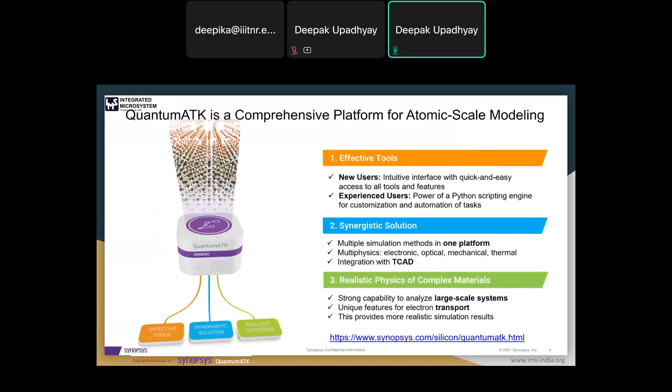This Quantum ATK is a comprehensive platform for atomic scale material and device modeling. We also offer effective tools for achieving realistic outcomes, and a synergistic solution to solve complex problems. Now, if we talk about the bigger applications of this tool...

Any kind of molecule you can design, whether inorganic or organic molecules. We also have the surface builder, so for creating any kind of surface structure, basically we need to define the Miller indices, such as 100, 101, 111. Whatever combination you want to create the surface with, just define the Miller indices, and the software will automatically create the surface structure.

Even the interface between two materials, or more than two materials, is also possible. And if we talk about device applications, in this Quantum ATK we support one-probe device structures, two-probe device structures, even three-probe device structures that you can easily simulate, like MOSFETs and transistors. So these are the bigger applications where you can utilize this Quantum ATK.

With this QuantumATK, one can model a wide range of atomic physical systems, including molecules, polymers, 1D and 2D materials, any kind of crystal structure, amorphous materials, interfaces and multiple layer structures, and even device simulations that you can easily create. It also comes with tailored GUI tools to build and visualize such models, set up the script, manage local and remote machines, and analyze the results.

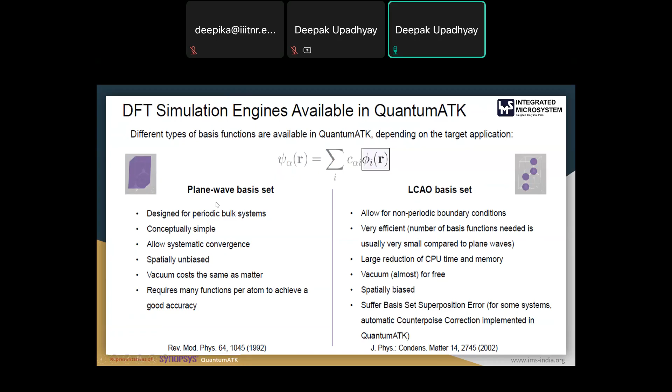So the conclusion is that the hybrid functional DFT-LCAO is up to 10x to 100x faster than the DFT plane wave method.

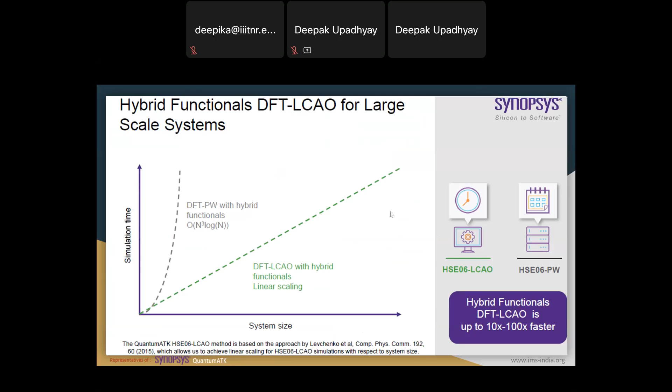Now it also comes with the DFT plus non-equilibrium Green's function method for simulating realistic interfaces and surface structures. This DFT plus NEGF method is an accurate tool to study interfaces and electronic devices. Here you can see we have the two-probe device structure where we have the left electrode, right electrode, and also the center region.

Not only the two-probe device structure, even three-probe device structure you can easily simulate, and then you can define their biasing voltage, gate voltage, so that you can simulate their resistance, capacitance, and IV characteristics. This NEGF method you can combine with the linear combination of atomic orbitals (LCAO) basis set, and you can also combine with the plane wave basis set, and even with semi-empirical tight binding models.

Now this Quantum ATK also comes with battery modules. So you can also design batteries like sodium ion, lithium air batteries, and then study their cathode materials using a multi-model computational approach like DFT, semi-empirical, classical force field, and the machine-learned force field simulation. You can also obtain the lithium ion diffusion path and rate using a combination of techniques like the nudged elastic band method, harmonic transition state theory, and adaptive kinetic Monte Carlo simulation.

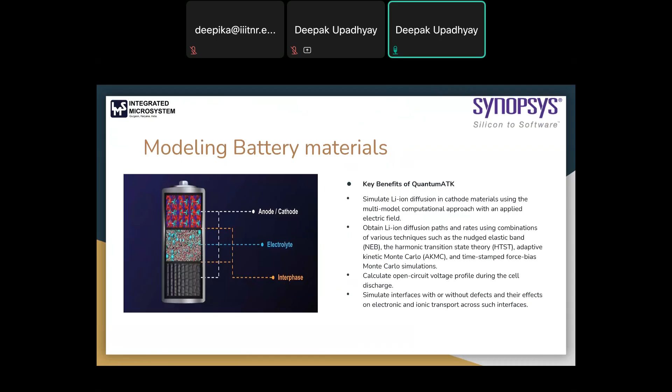Now, if we talk about the bigger applications of this Quantum ATK software, it covers a wide range of applications starting from materials to devices.

If you talk about semiconductor applications, users can study the properties of new materials, interface structures, contacts and stacks, and their impact on logic and memory devices. And if you talk about battery materials, users can design novel battery materials for cathode and anode, liquid and solid electrolyte materials, and even calculate the open circuit voltage.

And if you talk about solar cell simulation, you can design novel photovoltaic materials and even devices with improved photocurrent. You can follow the standard solar cell spectrum in the center region, and then study various electrical properties. For polymer simulation, you can design polymers with improved thermomechanical, thermoconductivity, and optical properties. And even catalysis, metals, ceramics, and glasses are also possible.

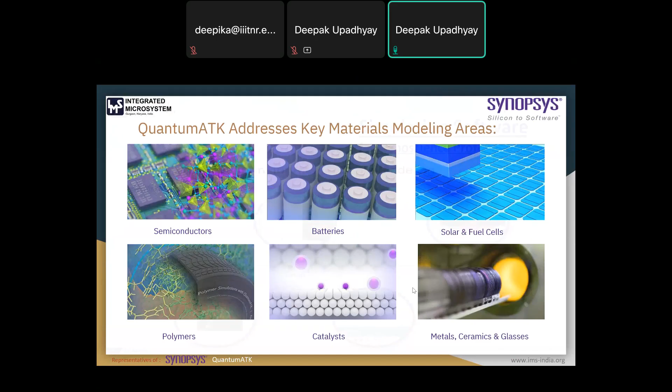Now, if we talk about the simulation procedure in this Quantum ATK, typically you need to create your structure in the builder. Any kind of structure you can create, and then you can go to the setup, which is possible from the workflow builder. So you need to set up your calculator.

You can see we have DFT LCO, DFT plane wave, semi-empirical, and also classical force field and machine-learned force field simulation. In the meantime, you can also select your analysis part, and then go to the run option. That will be possible from the job submission settings, where you can fire the job from the GUI to the local machine or a remote machine.

And once you've done the simulation, you can visualize your structure using the visualizer tool, either in 1D view, 2D view, or 3D view.

It also comes with machine learned force field simulation. So the question arises, why do we need this machine learned force field simulation? It is an accurate dynamical modeling tool for complex structure generation, mechanical properties, thermal properties, electron phonon scattering, diffusions, and also process simulation for atomic layer deposition and atomic layer etching.

Other dynamical tools are typically limited to 100 atoms due to turnaround time limitations. But most industries require 10,000 plus atoms to be simulated at a single time, and that is not practical with quantum-based methods because of the quality of results and turnaround time limitations.

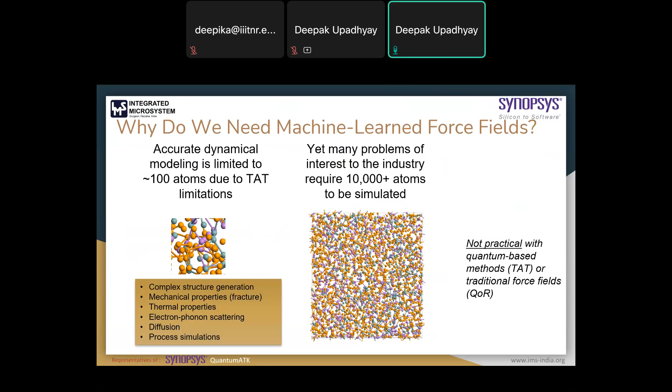For atomistic modeling, we typically work within three types of models that provide different levels of accuracy at different computational costs. At the low level, we have traditional force fields, which are very efficient but often lacking quality of results. In the middle, we have semi-empirical models like tight binding, which can provide higher accuracy at higher computational cost. At the top, we have ab initio methods like density functional theory, which can provide higher accuracy but at increased turnaround times.

So here we have the machine learned force field simulation, which will allow you to train a potential to reproduce ab initio results at low computational cost, similar to the traditional force field.

Here you can see we have simulated an amorphous HfO structure, and in this structure we have a total of 96 atoms. We performed 50 molecular dynamic steps on 16 cores. In the case of DFT with molecular dynamic simulation, it took 3 hours, 21 minutes and 27 seconds. Using MTP, the moment tensor potential, which is part of machine learning technique, it took 10 seconds, and using the classical force field, it took 9 seconds. But we get maximum accuracy with low computational cost by using the machine learned force field technique.

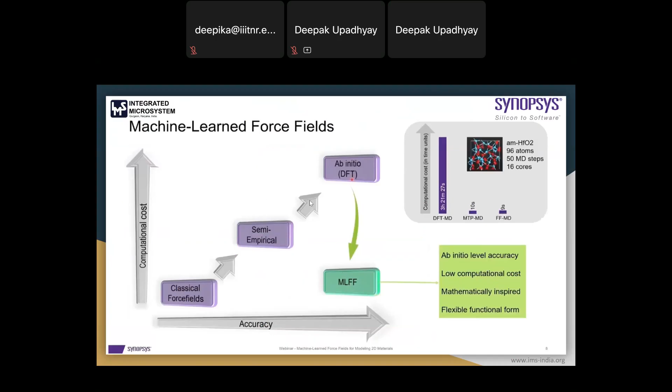These are some machine learned force field applications where you can use this MTP, moment tensor potential, for the structure of complex crystals and amorphous materials, structure of multiple layer stacks, formation of defect clusters, interdiffusion, defect diffusion, thermal transport, crystallization, and also amorphization.

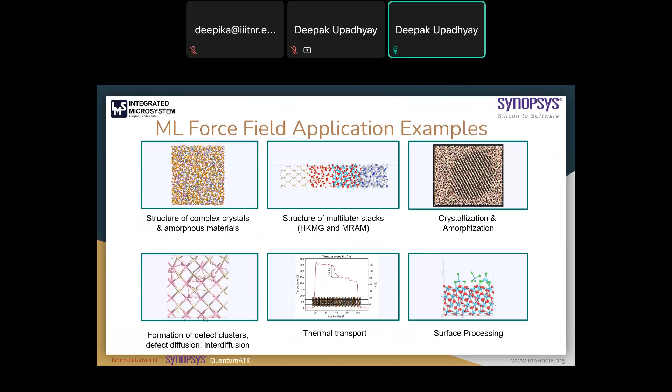This Quantum ATK comes with a sophisticated graphical user interface called Virtual NanoLab. This GUI is very easy to use, and it also comes with a Python programming interface that enables experienced users to efficiently implement complex workflows and perform advanced data analysis.

Now, if we talk about some advanced analysis that a user can do in this Quantum ATK, we also support molecular dynamic simulation. We have both classical molecular dynamic simulation and ab initio molecular dynamic simulation using different techniques like NVT, NPT, stress strain, Langevin, and you can also optimize your geometry and perform optimization for devices. You can also do dynamical matrix, Hamiltonian derivative, charge point defect, and even polymer simulation is possible.

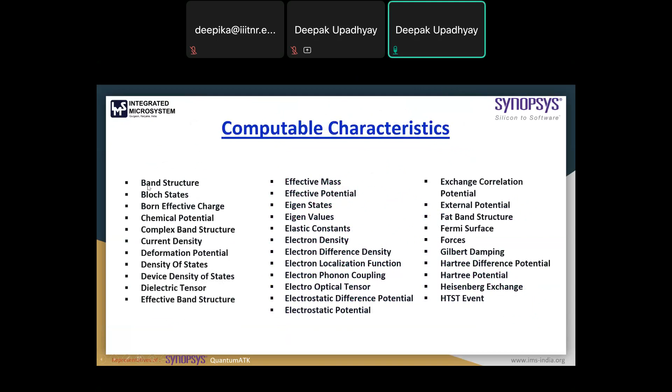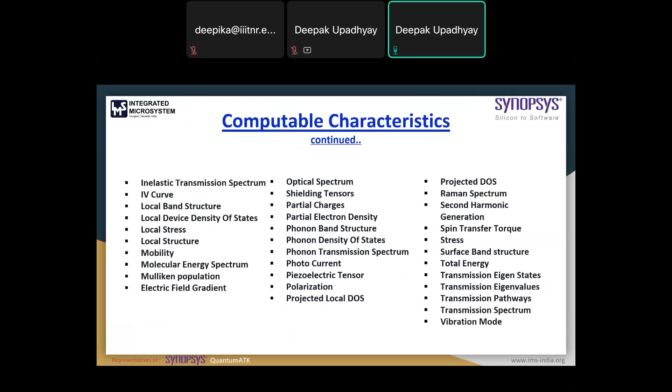These are some listed computable characteristics for materials and devices that users can study in this Quantum ATK, like band structure, Bloch state, Born effective charge, chemical potential, complex band structure, density of states, phonon band structure, optical spectrum, and also projected density of states, Raman spectrum, photocurrent. So these are the list of computable characteristics.

If we talk about the job manager, it is basically responsible for running the job from the GUI to the local machine or a remote machine. On the local machine, we support serial, threaded, and parallel execution for faster simulation. We also support remote submission modes like TORQUE, PBS, Slurm, SGE, LSF, and also direct execution.

If we talk about system requirements, for using this Synopsys Quantum ATK software, there is no external library dependency beyond the standard OS packages required. If we talk about ATK, that is the background simulation engine, and VNL, Virtual NanoLab, that is the graphical user interface. Both the calculation engine and the GUI are available for both Microsoft Windows and Linux 64-bit operating systems. It also comes with MPI parallelization for faster simulation, and it comes as a floating license.

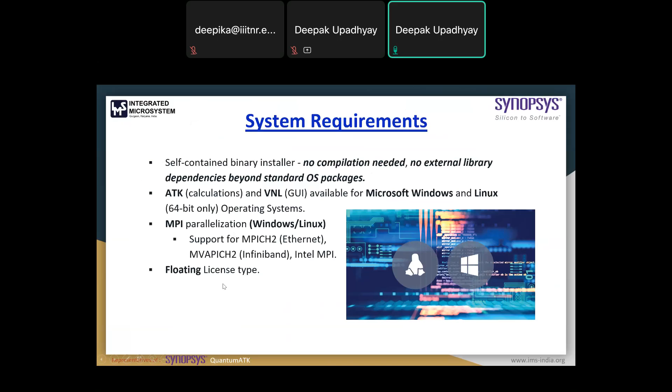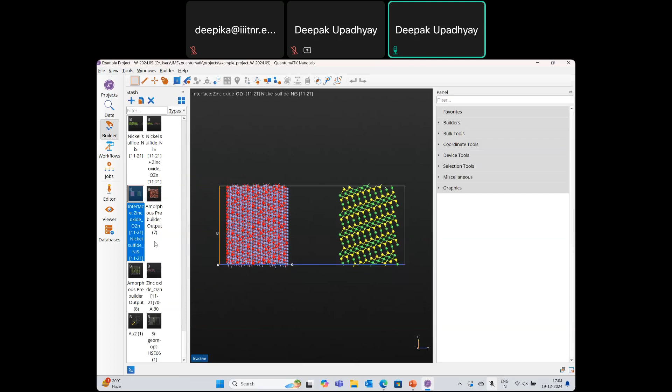This is the builder, the main part of this Quantum ATK, where we need to create our structure, and whatever structure we create will be stored in the stash. So this area is called the stash. Here we will show the 3D view, and this is the advanced panel toolbar.

This advanced panel toolbar will help you create your desired structure. We have various builders: AFM cantilever tip structure, amorphous builder, alloy builder, icosahedron builder, interface builder, nanoparticle, nanowire, nudged elastic band, and even the bulk tool option. You can repeat your cell, merge the cell, create the super cell, lattice, and we also have the device tool as well.

So this is the workflow. In the workflow, you can see we have various calculators: the LCAO calculator, the device LCAO calculator, plane wave calculator, semi-empirical calculator, device semi-empirical, force field calculator, and also the ground state calculator that combines with the many body perturbation theory.

Here you can see this is the job submission settings. This is the local machine. If you want to run the job on a remote machine, then you need to set up the remote machine first. So you can see this is the new direct remote machine, local machine, LSF, PBS, PBS Pro, SGE, and also the Slurm machine.

Now this is the editor. If you are expert at writing the script, then you can write your own script here. And if you are not aware, then you can go to the builder part.

This is the view where you can visualize the 3D view, and this is the online database. In the online database, you can see we have the Crystallography Open Database, and we also have the Materials Project.

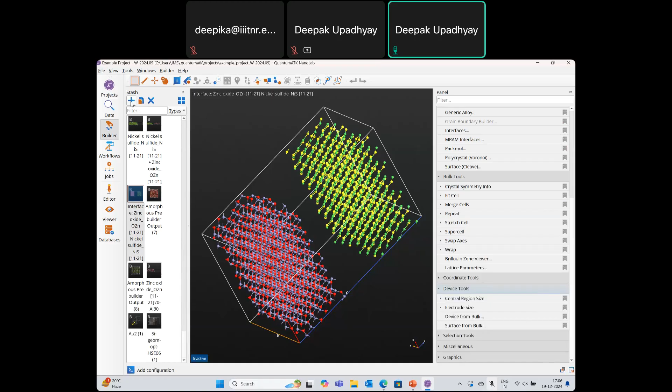So if you want to start from scratch, you need to select this builder and select this add option. In the add option, you can see we have the new configuration. Once you select a new configuration, a default isolated hydrogen element will be added. You can see this is hydrogen with the fractional coordinate point 0, 0, 0.

If you want to change this hydrogen with any other element, you can see we have the toolbar and we also have the periodic table. This is the periodic table. Any element you can select as per your need, and then you can change the element. So you can see the hydrogen has been replaced by the aluminum element.

Now if we talk about the database, this is the local database where we have the molecular structure, crystal, fullerenes, zeolite, monomers, and also the ground state element. So these are the list of molecular structures.

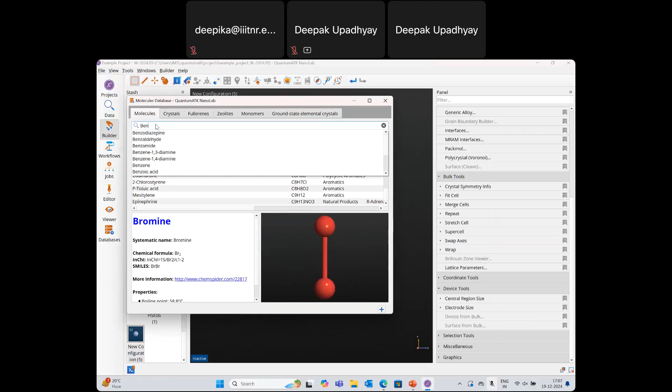You can easily search the molecule here. Like you can see, this is the benzene molecule. And if you want to know the property of this benzene molecule, you can see this is the chemical formula and this is the properties, like we have the boiling point, melting point, molecular weight.

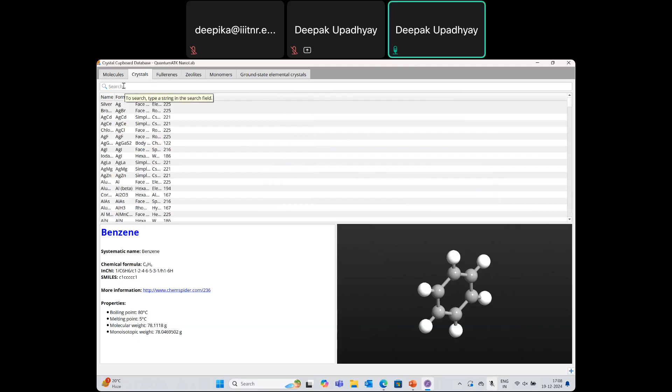This is the crystal section, so we have the list of crystal materials as well. We have various lattice types like face center, body center, rhombohedral, and hexagonal. Here you can also search the material. Like you can see, this is silver, and it's a face center cubic structure. You can see the ABC value and the symmetry information, along with the element and their fractional coordinate points.

We have the fullerene structure as well. You can see these are the fullerene materials, and these are the zeolite materials. We also have the monomers for polymer simulation.

Even importing new monomers is available. Here you can see this is the import option. In the import option, you need to define the name, their group, and the type of monomer, and also import the molecules. Then it will convert the molecule into a monomer, and you can easily simulate and study it for polymer simulation.

Here you can see these are the ground state elements. If you want to add any material in the stash, you simply need to click on this add option. You can see this is the silver that I have imported from the local database. Suppose the material you want to work with is not available in the local database, then you can go with the online database.

Here we have the periodic table. In the periodic table, we need to select our elements first. Like you can see, this is hydrogen and this is oxygen, so two elements have been selected. Now you need to click on this search option, and it will search every possible combination of hydrogen and oxygen.

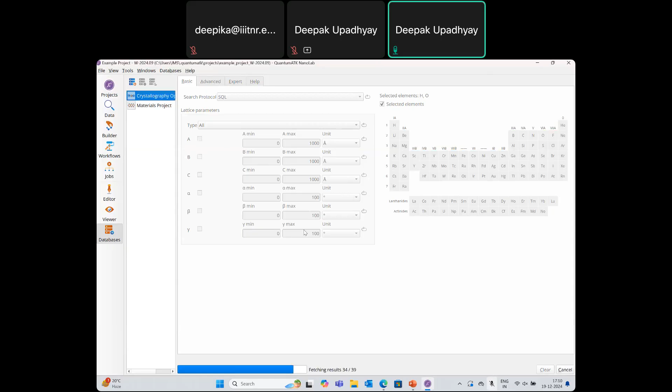Now you can see it is searching from the Crystallography Open Database, and similarly you can also use the Materials Project. You can see it has found 39 structures with different crystal types, like simple tetragonal, base centered, rhombohedral, hexagonal, and simple cubic structure. Like you can see, this is hydrogen peroxide, this is the lattice information, this is the symmetry information, and also this is the ID number.

Now, if you want to add this structure into the builder, you need to click on this arrow and then select builder. You can also download this file, and even copy this COD identifier number. So you can see this is the COD identifier number.

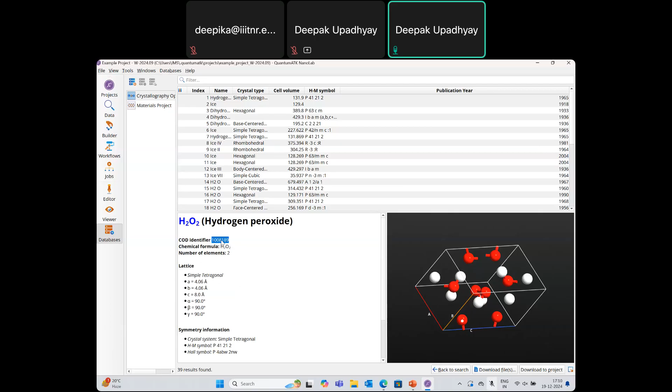You can go to the builder, select this add option, and you can see this is the plugin toolbar. We have the Crystallography Open Database for crystals, and we have the PubChem database for molecules. You can see it is asking to enter the COD identifier number, so we will paste the COD identifier value and click on this download option. Then it will easily download our structure into the stash, and we can visualize the 3D view here.

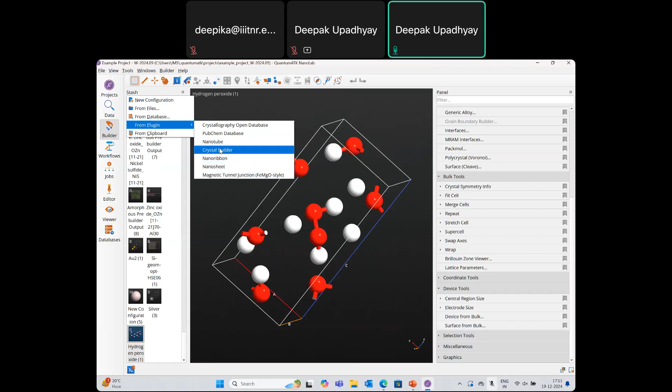Suppose the material you want to work with is not available either in the local database or the online database, then you can create your own structure using the plugin toolbars. This is the crystal builder that will help you create any kind of crystal structure, either triclinic, monoclinic, orthorhombic, tetragonal, trigonal, hexagonal, or even cubic structures like face centered cubic and body centered cubic. Then you can define their ABC value, alpha, beta, gamma value, and add the element and their fractional coordinate point.

Then you can see this is the preview option where we have the primitive cell and the conventional cell. Suppose I would like to take a face center cubic structure, so I would select their space group, and you can see the Bravais lattice will be automatically selected, and this is our face center cubic structure. Here we can define the ABC value as per our research work.

Then you can add the element by selecting this add option. You can see these are the various fractional coordinate points, so I would like to go with XYZ. You can see it has automatically selected the hydrogen element, and this is the structure.

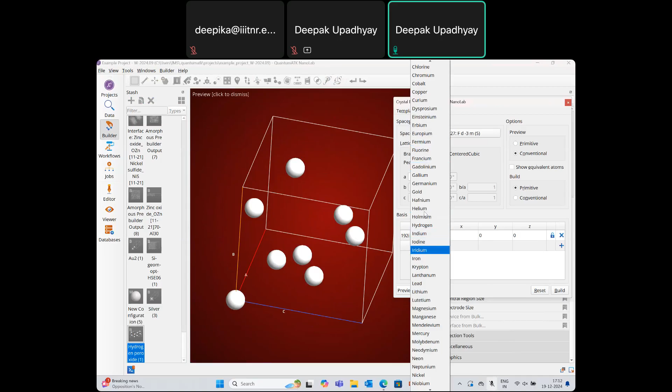If you want to change this hydrogen, you need to double click, and you can see this is the list of elements. If you want to select gold, you can see this is the gold material, and this is the conventional cell. If you want to show the primitive cell, select primitive and go to the preview option, and you can see this is the primitive cell. This way we can easily create any kind of crystal using the crystal builder, and once you're done, you need to click on this build option.

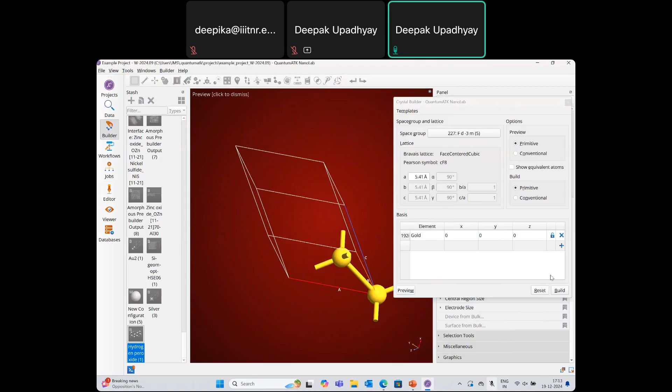And here you can see we have the more plugin toolbars. We have the nanotube builder. By using this nanotube builder, we can create multiple nanotubes. Here you can see we have the inner tube, center tube, and outer tubes.

And here you can see we have the chemical properties. So at site A we have the carbon, at site B we have the carbon. You can also change the element from the periodic table, and you can define the bond distance. If you go with the default value, you can see this is the carbon nanotube. Now you can also change the chiral vector N and M value as per your need.

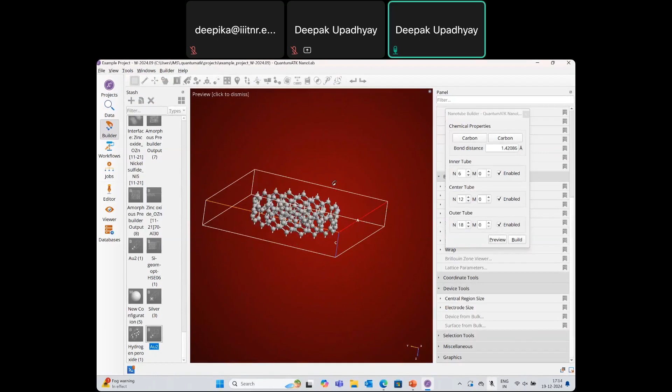If you want to enable the center tube as well, you can see we have the inner tube, we have the center tube. So we have three tubes: center, inner, and outer tube. So this is the carbon nanotube.

If you want to design any other nanotube, simply you need to replace the site element. If I select this silicon element, you can see it will create a silicon carbide nanotube.

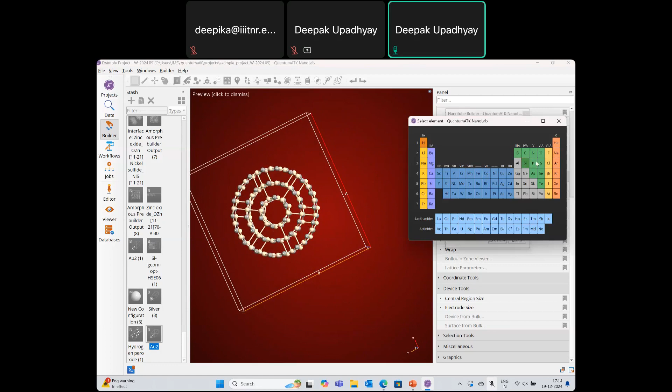And if you want to work on the MoS2 nanotube, we need to replace both the site elements. You can see this is the molybdenum at site A and sulfur at site B. And then you can define the bond distance. For desired bond distance, you can design, and then you can go with the inner tube, center tube, and the outer tube. Now you can see this is the MoS2 nanotube.

So I would like to go with the center tube, select this preview, and then click on this build option. Now you can see this nanotube is quite thin.

So if you want to increase the length, you can go to the advanced panel toolbar. And in the advanced panel toolbar, we need to go to the bulk tool. In the bulk tool, you can see we have the repeat option. So we can repeat our cell in any of the directions, either direction A, direction B, and direction C. So I would like to repeat in the transport direction, that is C.

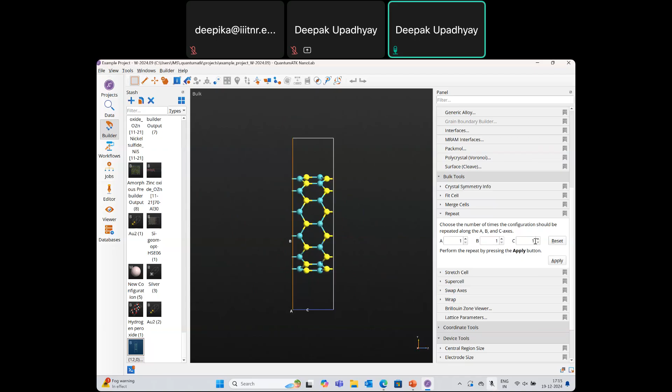So you can see 10 times in the transport direction, and then apply. Now you can see the length of this nanotube has been increased 10 times in the transport direction. So this way we can easily increase the length of any structure.

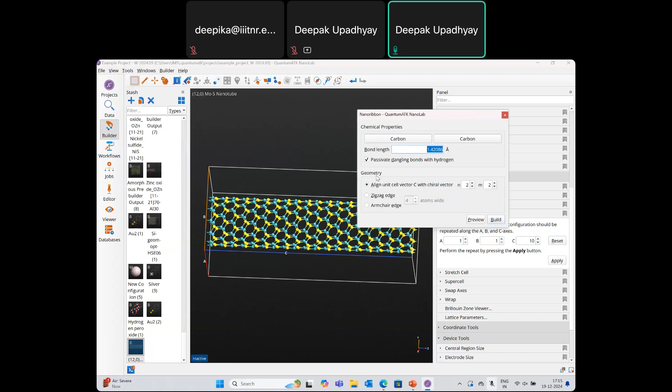And now if we talk about the nano ribbon, similarly we need to define the chemical properties, their bond length, and also the passivation with the hydrogen element. Then that you can also include. And then you can go to the geometry, where you can define either align with the chiral vector and n, m value, or you can go with the zigzag and the armchair structure.

You can see it is aligned with the chiral vector and n, m value. If you want to show the zigzag, this is the zigzag structure. And if you want to show the armchair, this is the armchair graphene nano ribbon.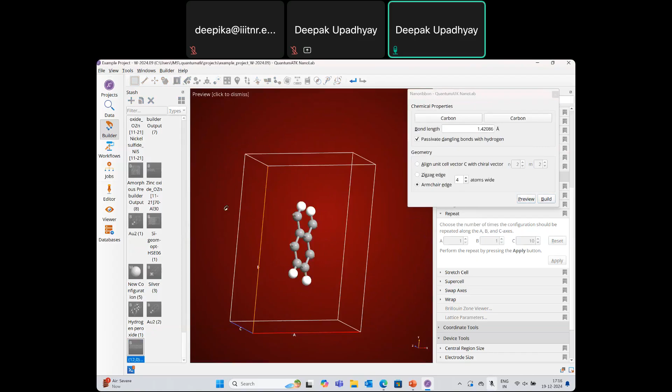So I would like to align with the chiral vector, and you can also increase the length, and then select this preview. So this is the graphene nano ribbon. And if you want to create a nano sheet, you can see this is the nano sheet option.

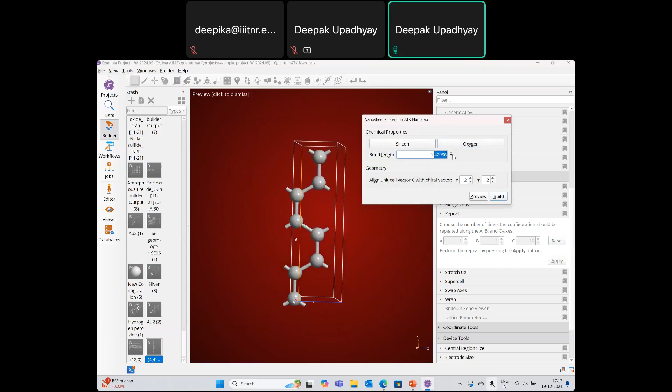Similarly, we need to define the chemical properties, bond length, and then the chiral vector, and select this preview. So you can see this is the graphene sheet. If you want to create a silicon dioxide nano sheet, here we will select the silicon element, and if I select the oxygen, silicon dioxide, and then you can define their bond distance, and then select this preview. Now you can see.

So this way we can create any kind of nano sheet, and if you want to increase the length, you go to the advanced panel toolbar, select this repeat option. Now you can see. So this is the single layer.

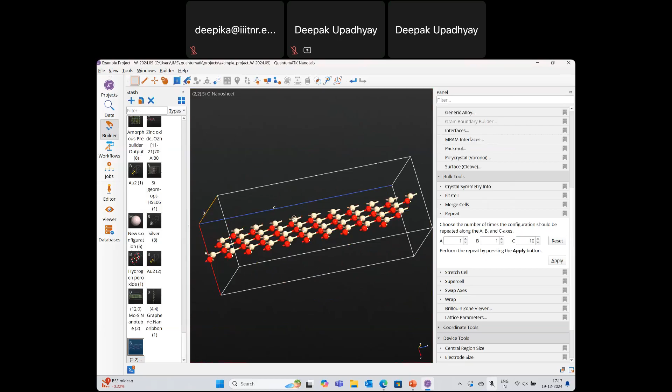If you want to work on the multiple layer structure, simply you can copy. So first you can select the element, then copy, and then you can manually paste here. And either you can go with the mirror option. Here you can see, so this way you can work on the multiple layer as well.

Now if we talk about the magnetic tunnel junction, you can see we can define the electrode element at the left side and the right side, then define the lattice constant, and then you can also enter the electrode extension layer, and then you can define the barrier materials. So in the barrier material, it will be oxide materials, and then you can define the number of layers and the separation, and then you can select this preview.

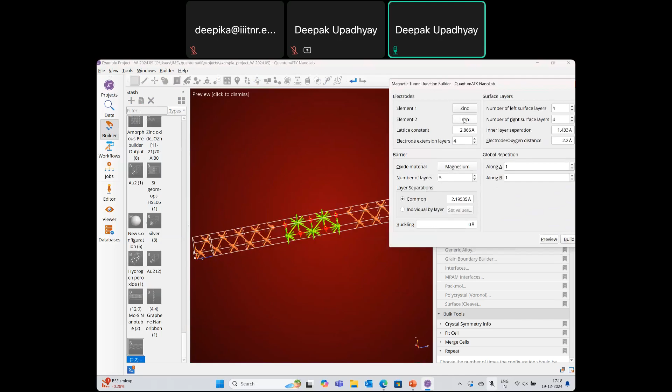Now you can see we have the iron at the left electrode, iron at the right electrode, and we have magnesium in the center region. So this is the magnesium oxide in the center. You can easily change any element from this periodic table. Suppose I would like to select the zinc at the left and right, you can see.

So this is the magnetic tunnel junction.

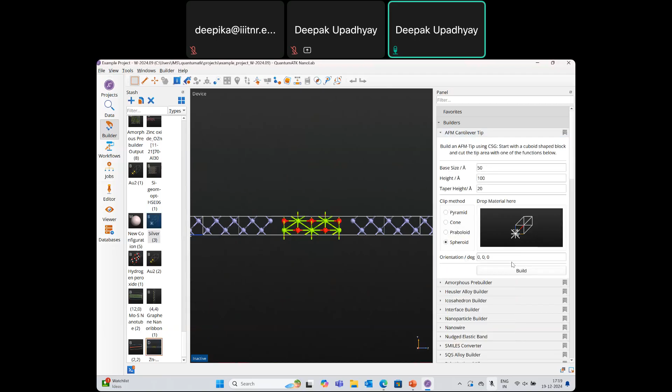If we talk about the advanced panel toolbar, you can see this is the AFM cantilever tip structure. For creating the AFM cantilever tip structure, basically we need to drop the material, define the base size, their height and taper height, and then define the clipping method. Suppose I would like to go with silver. You can see I have dropped the silver material in the material section, and if I go with the default value, you need to click on this build option.

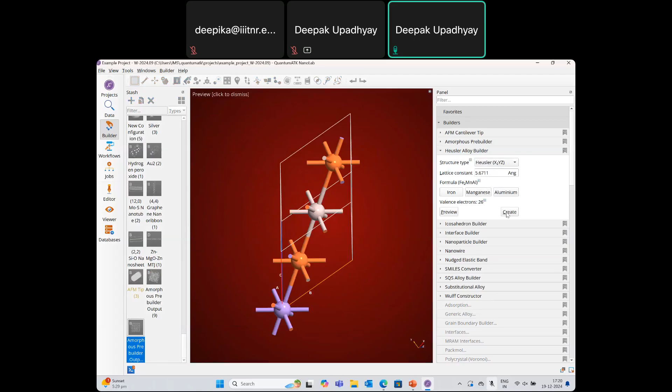And if we talk about the alloy builder, this is the Heusler alloy builder. Here you can see we have the structure type, with a different combination of X, Y, Z, where X and Y are the transition elements and Z is the main group element. Here you can define the lattice constant, and then define the formula. This way you can easily create a Heusler alloy structure.

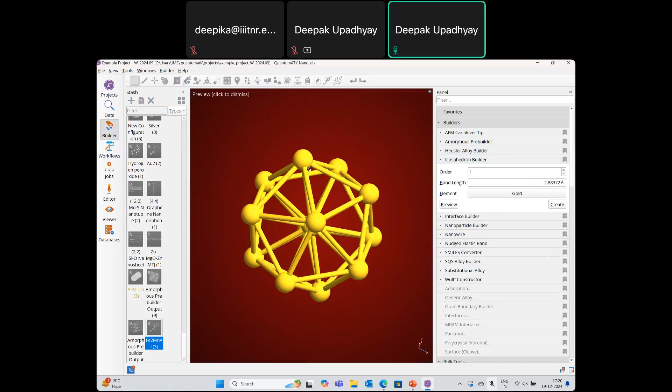And if we talk about the icosahedron builder, we need to define the order, the bond length, and then drop the materials. Here you can see from this periodic table we can select any element and then select preview. So this is the gold based icosahedron structure. If I increase the order, you can see this structure will change.

Now if we talk about the interface builder, this is the interface builder for two materials. And if you want to create the interface between more than two materials, then you can go with the interfaces option.

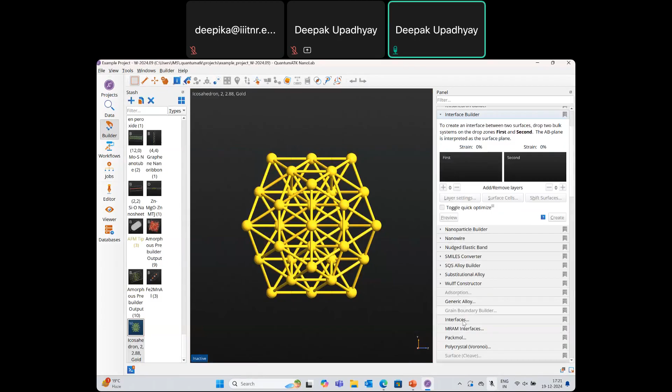So let me create the interface between two materials first. You can see this is gold in the first strand, and then silver material in the second layer. Now it is generating the interface between the gold and the silver.

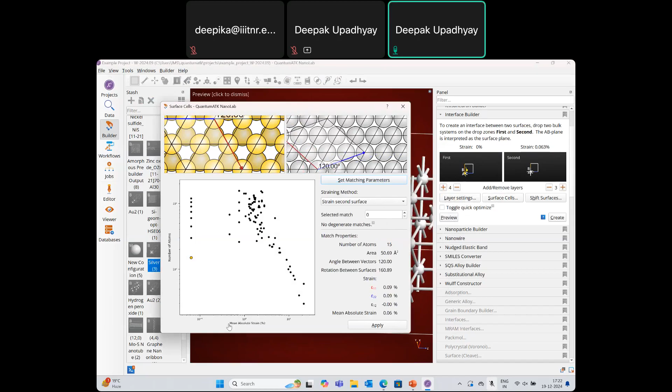You can easily add the layer by selecting this add option, and you can also go to the layer settings. In the layer setting, you can decrease or increase the layer, and these are the surface cells settings. In the surface cells setting, you can see we have the graph of the number of atoms and the mean absolute strain. At this point, we have a total of 15 atoms.

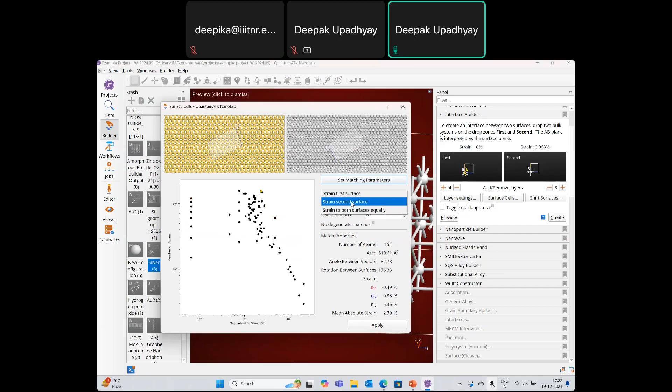This is the area, this is the angle between the vectors, and this is the rotation between the surfaces. If I increase the point, you can see the number of atoms has increased, and also the area. If I go with maximum point, 154 atoms, and then you can also define the straining method — strain first surface, second surface, or both surfaces. Now I would like to apply, and you can see this structure has been changed.

So this is the interface between gold and silver material. And here you can see we have the optimization settings. If you want to optimize your structure before going to the builder, you need to select this toggle quick optimization, then select preview, and then click on this create option. Then after the optimization, it will generate your structure in this tab, and this is the 3D view.

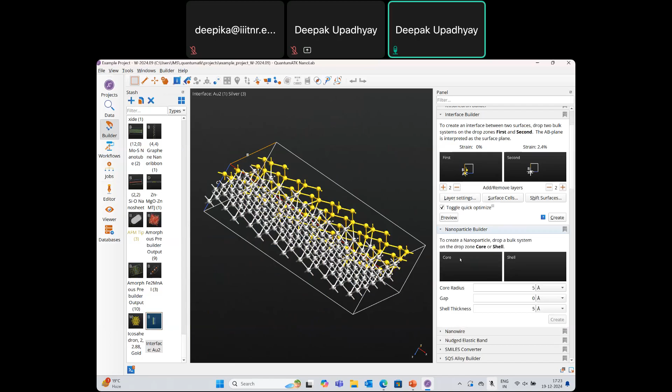Now you can see this is the nanoparticle builder. For the nanoparticle builder, we need to drop the material in the shell and in the core section, and then define the core radius, the gap between the core and shell, and the shell thickness. I would like to drop the material — you can see gold in the core and silver in the shell. Then you can define the radius, gap, and shell thickness, and click on this create option. It will easily create a nanoparticle structure.

So in the core, you can see we have the gold, and this is the silver material.

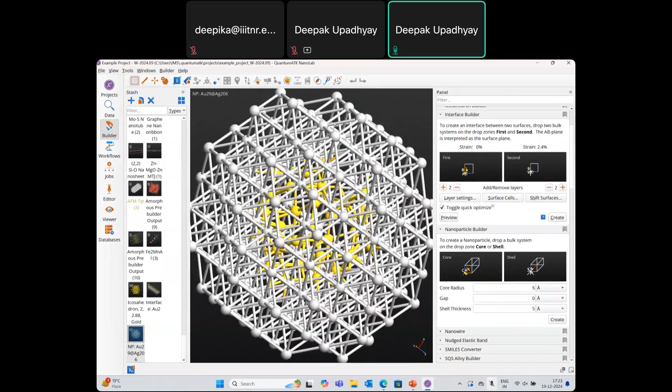Now we have the nanowire builder. So for creating the nanowire structure, our structure should be the simple cubic structure, either face center cubic structure, or body center cubic structure.

So I would like to take a cubic structure. Now you can see we can define the wire direction, either 100, 110, or 111. And then you can define the nanowire properties like the nanowire radius and then the surface energy.

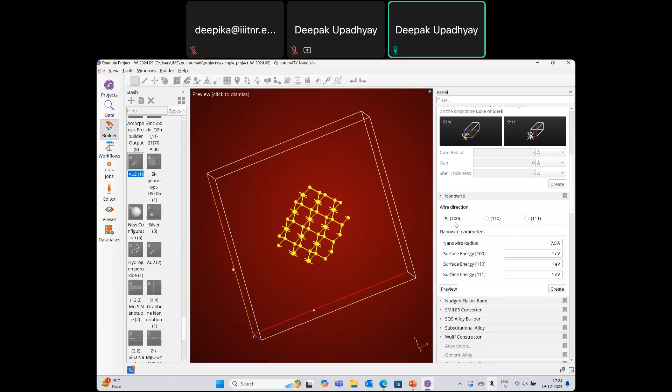This is the nanowire in the direction of 100. If I select the 110, you can see.

Now, if you want to increase the length, you can go to the repeat option, and then you can enter the value and click on apply. Now you can see, this is the gold-based nanowire.

Now, if we talk about the device simulation, suppose you can see we have created a nanotube structure. Now you can see this is the MoS2 nanotube.

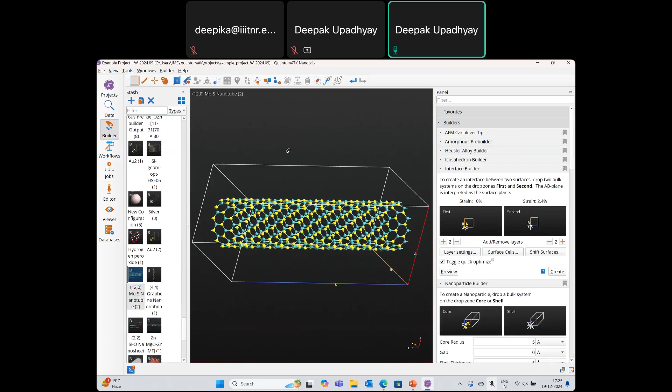If you want to create a device from this bulk structure, you can go to the device builder. You can see this is the device builder, and here we need to define the electrode extension length. You can see it is automatically selected their minimum electrode length for the left and right, 5.4 angstrom.

You can change the electrode extension length, and it will resolve your issue for the scattering between the electrode and the central region. Now, if you want to add the buffer region in the left and right region, you need

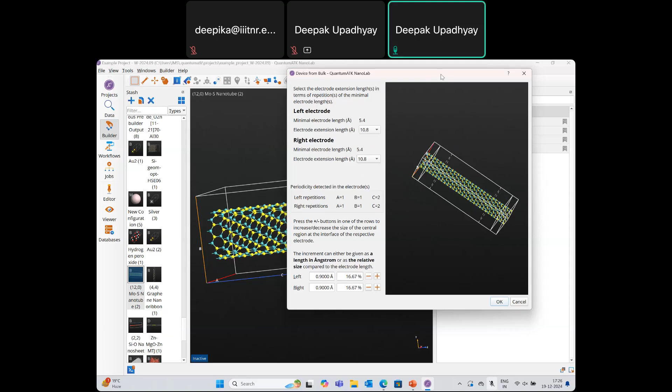to click on this add option. You can see, so this way we can create the buffer region as well. And if you're done with this device builder, you need to click on this OK.

So we have created a device, and if you want to include any kind of doping, you can go to the doping option where you can set the N-type doping and the P-type doping. And if you want to do the elemental doping, you need to select that particular element,

and from this periodic table, you can replace the element. Suppose I would like to go with the oxygen. Now you can see. So this is called elemental doping.

And if I show the N-type doping and P-type doping, so for the N-type and P-type doping, we need to select the region first. Like you can see here, I would like to select a P-type doping. Here you can see this is the doping type. We have the N-type and we have the P-type. This is the P-type. Here you can define their concentration value and then their unit.

Suppose I would like to define the N-type doping in the center region. Now you can see this is the N-type. And if I select the P-type doping in the right region as well, now you can see. So this is our PNP transistor.

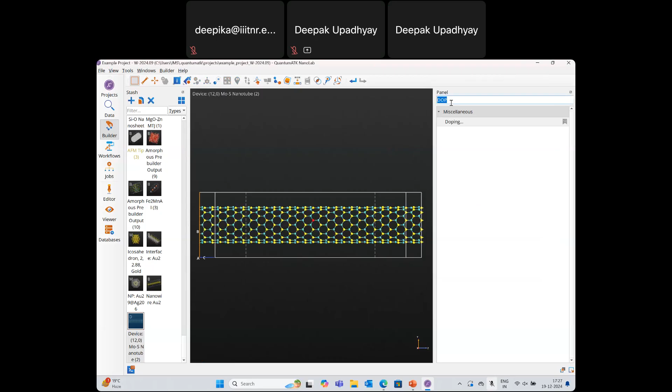And if you want to add the spatial region and if you want to convert this structure into a 3-probe device structure, then we have the spatial region. So here you can see we have the region type: we have the metallic, and we have the dielectric substrate region.

So first, let me try the dielectric substrate region, and then we will go with the metallic gate and the source and drain. Here you can see, this is the region.

Now you can see we have the geometry where we have the box, sphere, and tube. So this is our MoS2 nanotube. So we need to select this tube option.

Then we need to define the direction x, y, and z, their starting point and their ending point. And then you can define their inner radius and the thickness.

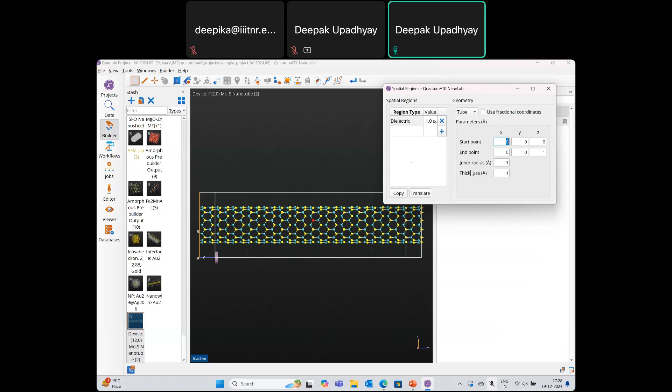You can also measure the distance between the center region, and then you can easily put the point here. Here you can see we have the distance measurement. So let me measure the distance first. If I measure the distance from this point to this point, you can see this is 66.61 angstrom.

Now we will go to the spatial region, and in the z direction we will define. Now you can see. If you want to make it centrally, then you need to define in the x and y direction as well.

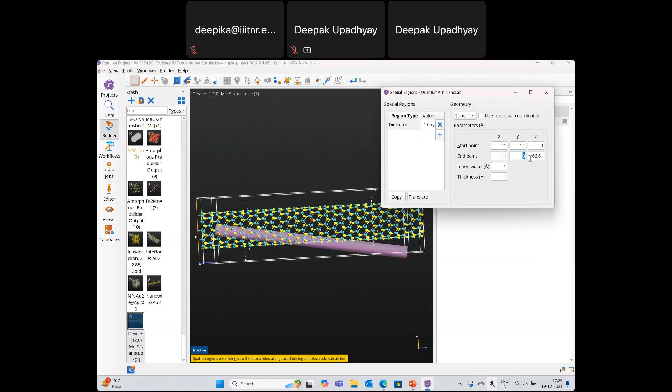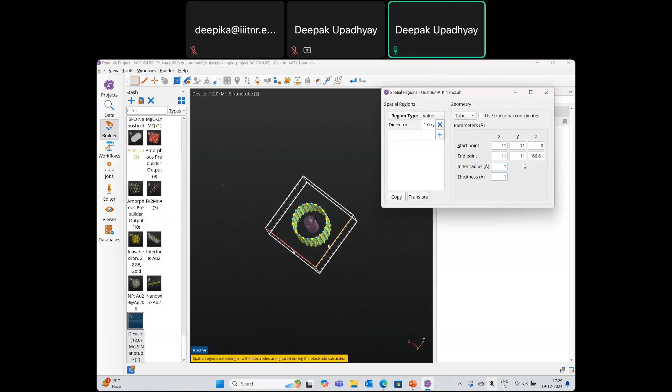Suppose I would like to go with the center position, now you can see this is in the center position. Now if you define the inner radius and their thickness, like you can see I would like to go with the 6. Here I would like to take 1 and their inner radius as 7 angstrom.

Now you can see we have created a dielectric substrate region. Similarly, you can create a metallic gate and also the drain and source. So this way we can create a 3-probe device structure, and also you can see this is the redo and undo option.

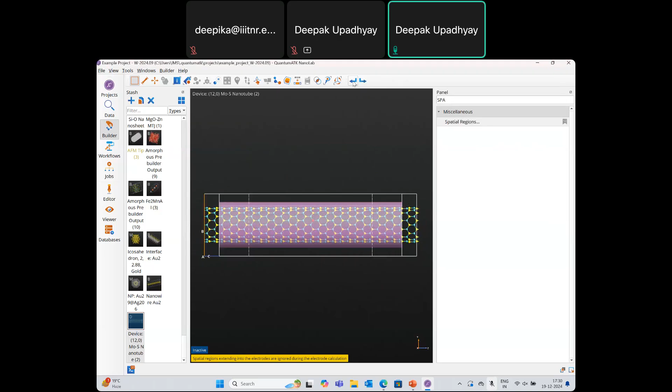Now I have already shown you the materials and the devices as well. If we talk about the simulation procedure, you can go with your desired materials. Suppose I would like to take this gold material for the simulation.

Here you can see this is the workflow builder. In the workflow builder, we need to set up the calculator and the analysis part. This is the LCAO calculator, and we also have the plane wave calculator. Based on your system and also the accuracy, you can select your calculator. You can see this is the LCAO calculator.

If you want to change any parameter in this DFT LCAO calculator, you need to double click. Here you can see we have the main parameter, LCAO basis set. In the main parameter, you can see we have the spin type. If you want to include any kind of spin in your materials, like unpolarized, polarized, non-collinear, and non-collinear with the spin orbit coupling.

Here we have the exchange correlation function like the LDA, GGA, meta GGA, hybrid function, and also the custom option. We have the pseudo potential method like norm-conserving and PAW potential. This is the pseudo potential like single zeta polarized, double zeta polarized, single zeta double polarized, double zeta double polarized, and single zeta double polarized.

We have the numerical accuracy where we have the occupation method. You can also define the temperature. You can also define the cutoff energy, and this is the K-point sampling method. Here you can see this is the density.

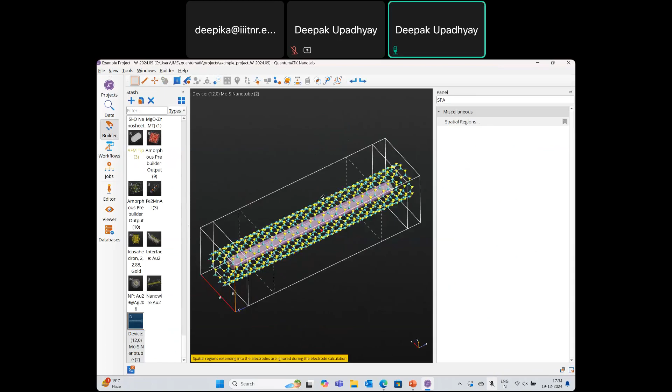Yes sir, the purple one shown, actually you increase the inner radius, so the dielectric material should be the outer part in that. The dielectric region should be under the center region. But you can see it is exceeding the electrode. Actually in some research paper I saw that, in the simulation part, it is outside, this purple one.

But if you go to the simulation part, you can see if I take this device for the simulation, you can see... yes.

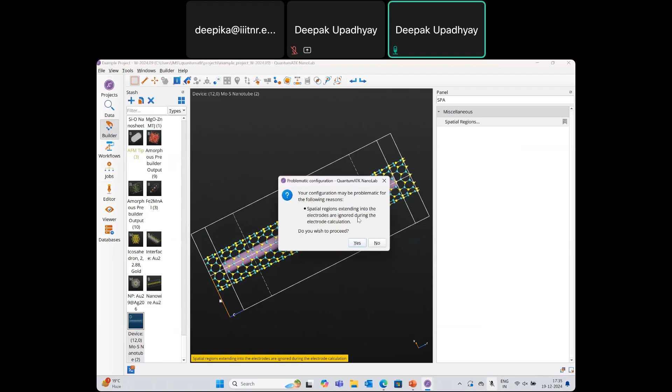Okay, sir. The spatial region extending into the electrode are ignored during the calculation. Okay, continue, sir.

So this is the workflow setup. Once you're done with the workflow setup, you can go to the editor and define the file name, then select OK. Now you can see this is the Python script. In Quantum-ATK, there is no need to write any script for any structure. Simply you can create this structure in the builder, go to the workflow settings where you need to set up the calculator and the analysis part, and it will easily generate your Python script.

This Python script is editable. Before the simulation, if you want to change any of the parameters and also the analysis part, you can add that. And if you want to write your own script, you can select the add option and write the script there.

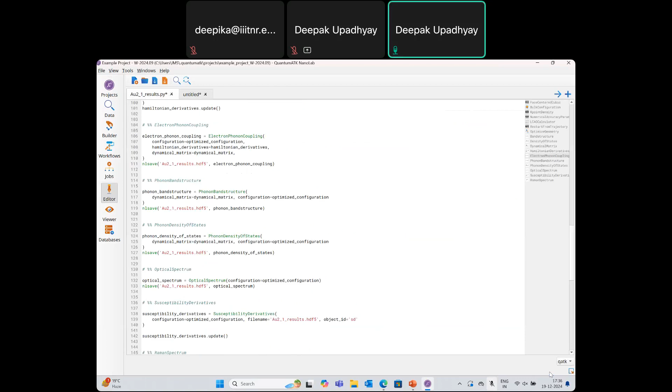Now this is the Python script. If I go to the job submission settings, we need to save this Python file by selecting save, and you can see this is the job submission settings where we have the local machine. For the remote machine, we need to set up the remote machine first, then it will find it here. This is the job type, and you can see we have the serial option.

This is my project, and here you can see the state is pending. If you want to run the job, you need to select the add option. Now you can see the state has changed and it is under running condition. Here we will get the log file, so whatever background simulation is ongoing, you will get the information here, and once it's done, you will get the output file in the data section.

So basically this is the procedure for simulating any kind of structure, either material or devices. In the workflow setting, you can see we have the template. If I select new template, new workflow, then the template, here you can see we have the calculator settings. If you are not aware of the calculator settings, like the exchange correlation function or what should be the k-point sampling, then you can go with the template.

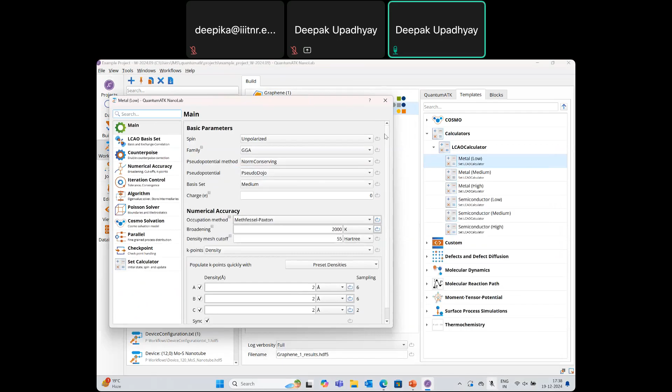You can see here we have the density, k-point sampling 6-6-2. If I select the higher density, you can see it automatically updates, so no need to change any parameter in the template.

In the template, you can see we also have the molecular dynamic simulation. This is the ab initio molecular dynamic simulation, and in Quantum-ATK we have the classical molecular dynamic simulation, this one. If I go with the traditional force field simulation, suppose I would like to take this amorphous material.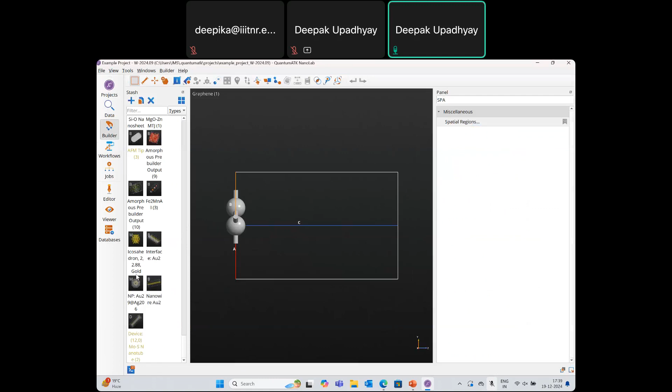In this amorphous material, you can see we have a total of 1500 atoms. If I select this MoS2, we have a total of 300 atoms. If I select and go with the classical force field, then within 2 minutes it will give our output. You can see this is the classical force field, and here it is showing the cross, but there is no parameter selected.

So basically we need to select the interatomic potential. From this, either you can go with the predefined potential set, we have the bonded potential set, the MTP moment tensor potential set, and the custom potential set. So we have molybdenum and sulfur in this structure, so we will go with this potential set, and here you can see there is no cross.

If I select the molecular dynamic simulation, you can see this is the molecular dynamic calculator that we need to add, and here we can define the method. In the method, we have NVE velocity Verlet, NVT Langevin, NPT, also stress strain, and then you can define the time step and initial velocities. You can see this is the Maxwell-Boltzmann distribution, configuration velocities, and zero velocities. Then we can define the temperature.

This way we can do the molecular dynamic simulation. You can also calculate the force, energy, total energy. Like you can see, this is the force. If I add the total energy, this is the total energy.

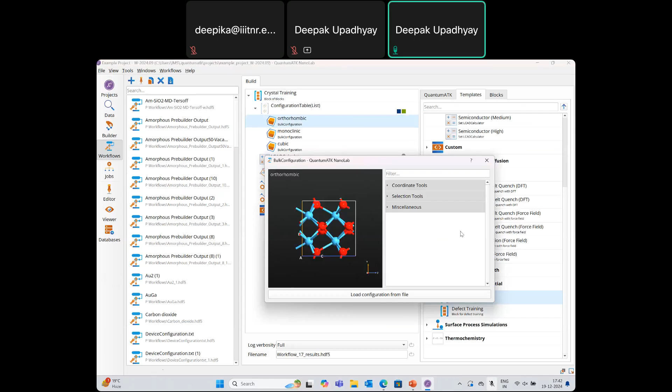Now you can see it is showing our structure. This is the Hafnia structure, and this is orthorhombic. If you want to load your own structure, you need to select load configuration from file. You can create the structure in the builder, and then you will get the structure information on the right hand side.

Suppose I would like to go with this nanowire - you can see this is the nanowire. Any material as per your need, you can select, and then go with the LCAO calculator.

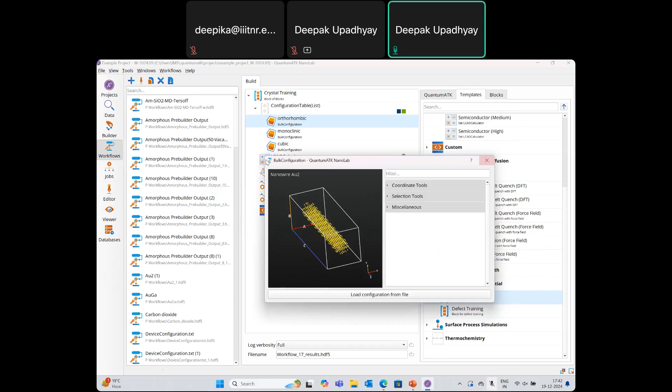Then it will generate the force, total energy, and the stress. Then it will go to crystal training random displacement by the strain method, where we can define the system size.

We can define the target sample size, and the atomic rattling amplitude. So all these input parameters we need to define.

Then it will go to scan over nonlinear coefficient. Basically it will scan over the DFT simulation, where we can define the number of initial guesses, and this is the GPU acceleration for faster simulation. You can also enable that.

Then it will go to the moment tensor potential training, where it will generate the entire potential in the fine-tuning step. Here is the input - we will get the moment tensor potential training data, and here it will store our output. So basically this is the process for the machine learning technique.

We also have the active learning technique in QuantumATK. You can see this is the active learning simulation, active learning molecular dynamics, and active learning optimized geometry option.

So for active learning we need to delete this one. We will add this active learning simulation - you can see it's showing a cross. Basically, we need to add one or two blocks, like the crystal.

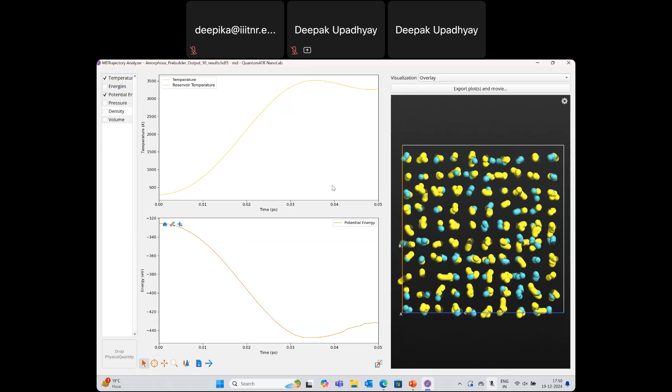Let me show the other simulation as well, like the device simulated data. This is my device configuration where I have the silicon PN devices.

I have simulated their projected density of state and also the Hartree potential, and also simulated their transmission spectrum. So this is my structure. We have the left electrode, right electrode, and this is our center region.

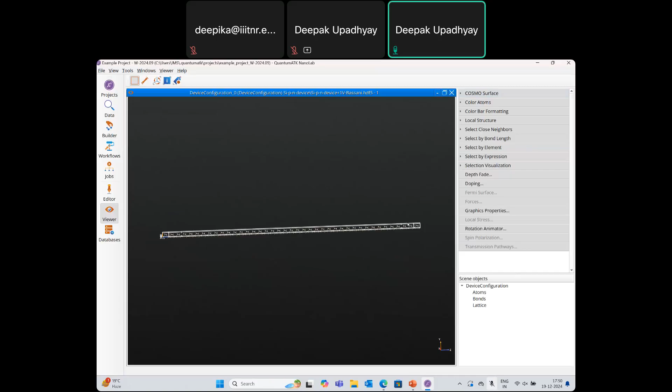Now, if I show the data, this is the Hartree difference potential, and this is the projected density of state. If I show the graph, you can see this is the projected density of state.

Here you can see this is the spin type where we have selected total spin. This is the energy spectrum. Now, if I show the transmission spectrum...

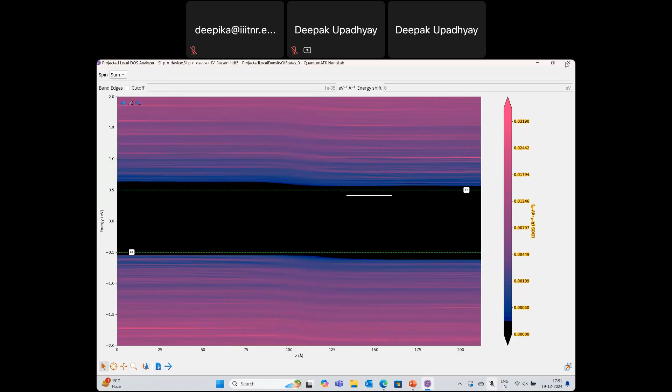Let me cancel this and then open this transmission spectrum. So I have shown you the maximum properties of this Synopsys QuantumATK software.

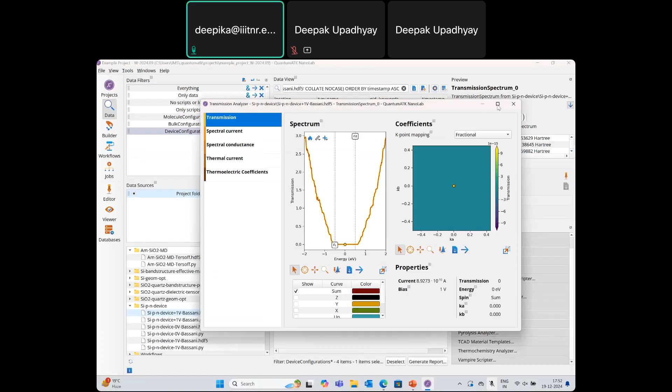Hello, yes sir, yes sir. Is the session complete, or will you tell something more? I'm going to conclude this session. Okay sir, if before this anyone has any query they can ask. Yes sir, I am just asking regarding that. Just wait one minute.

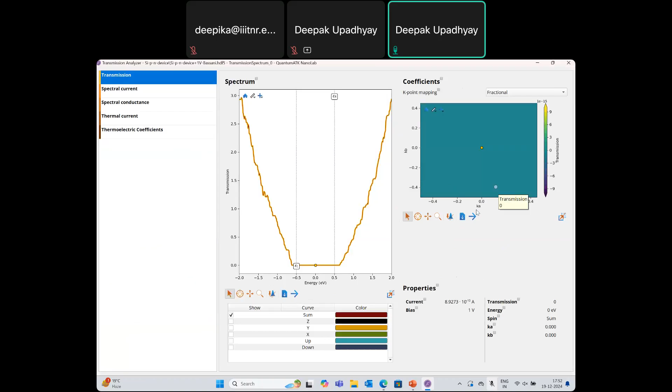Tell me sir. So this is the transmission spectrum graph. This is the spectrum with respect to energy, and this is the coefficient with respect to K. And this is the K point mapping. We have the fractional Cartesian, and here you can see this is the transmission at 0.

If I show the spectral current, this is the spectral current where we have the total spin, and this is the current value. Here you can also change the left chemical potential, the right chemical potential, and also the temperature.

Yes sir, tell me sir. And if you want to know more about this QuantumATK, their manual and tutorials, you can visit this Synopsys QuantumATK documentation.

Here you can see we have the tutorials, we have the manuals, and we also have the publication papers. This is the tutorial, you can see semiconductors, battery and energy storage, complex interface, 1D nanostructure, 2D material, and we also have the manuals. So if you want to know more about the background theory, like this is the DFT, you can see all the theory and their equations are mentioned.

So whenever you get the time you can visit, then I hope you will be more familiar about the procedure and also about the... Yeah, hello, good evening sir. Yes sir, good evening, sir can you tell something?

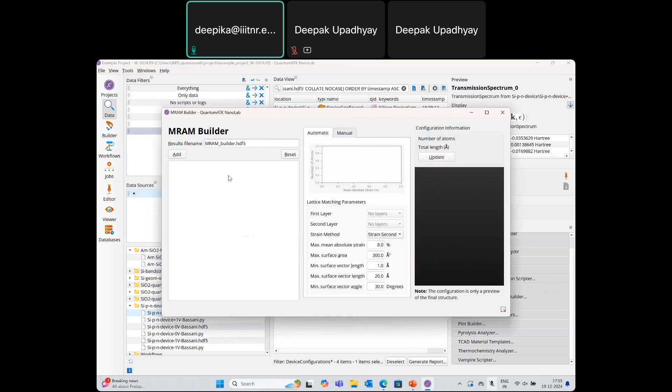Yeah, you can see this is the magnetoresistance RAM builder, where we need to select this add option to add the layer. More than one layer we require. You can see this is a crystal. We have the magnesium oxide, tungsten, and also iron, cobalt, and iron.

If I select one more layer, you can see. If I change this with iron cobalt, now I would like to add more layers. And here I would like to take iron. You can see this is the alloy and we have the crystal.

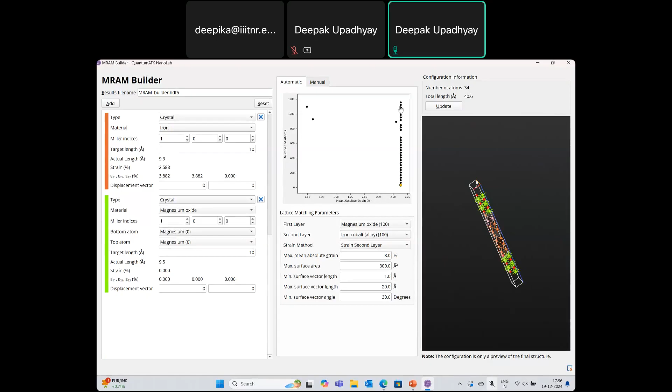Now if I show the structure, you need to click on this update. Then it will show a graph for number of atoms and the mean absolute strain. You can see this is our first layer where we have the magnesium oxide with the 100 surface. At this point you can see we have total 34 atoms and this is the total length. If I select this point, you can see.

This way you can create a structure and then you can select this arrow, go to the builder. Now you can see this is our design structure.

Then where will we go to the workflow? Yes, where you got the MRAM builder, you can even get the data section. Let me show. This is the MRAM builder, and even you can also find it in the workflow setting. Here you can see, this is the magnetoresistance RAM builder.

You can create a new workflow by selecting this option. Select this magnetoresistance RAM. You can see it is showing a cross because we have not selected any block. So we need to double click and then add the layer of the material.

One more doubt, whether we can observe the electrical properties of the system, the voltage and electrical current properties? Yes. So for the electrical property, first you need to convert this structure into a device.

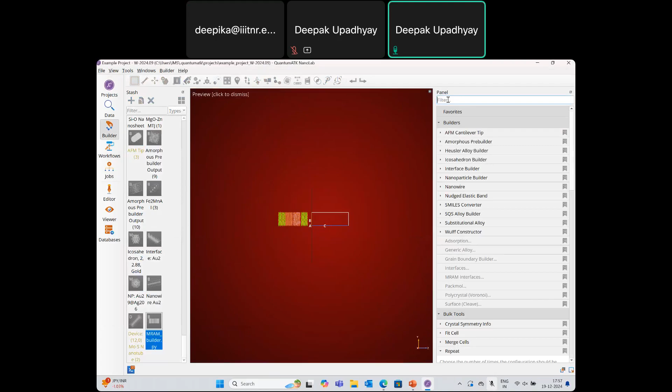Like you can see, we will create a device. Sorry, I think some of the preview... let me cancel. This is the device from the bulk.

So once you create a device, then you can study their electrical properties. You can see we have the electrode, left electrode, right electrode. This is our left electrode, right electrode. This is the center region.

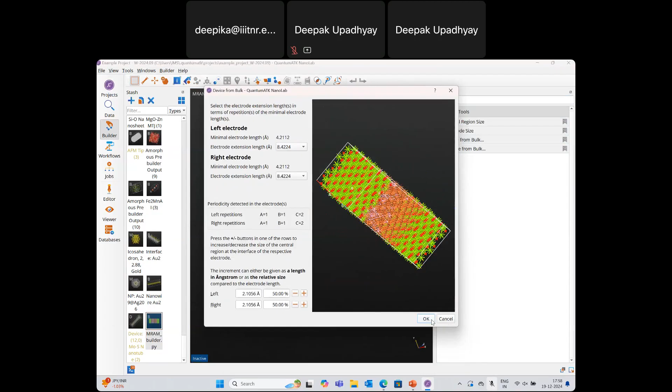And then you can select this, okay, and go to the workflow builder. You need to select the calculator, device calculator, and then you can go with the optical properties. If you want to simulate the IV characteristics, here we have it. You can define the gate to source voltage, drain to source voltage, their minimum point, maximum point, and also the step point. In the meantime, you can also add the transmission spectrum.

And if you want to add more analysis, you can see. These are the list of analysis properties.